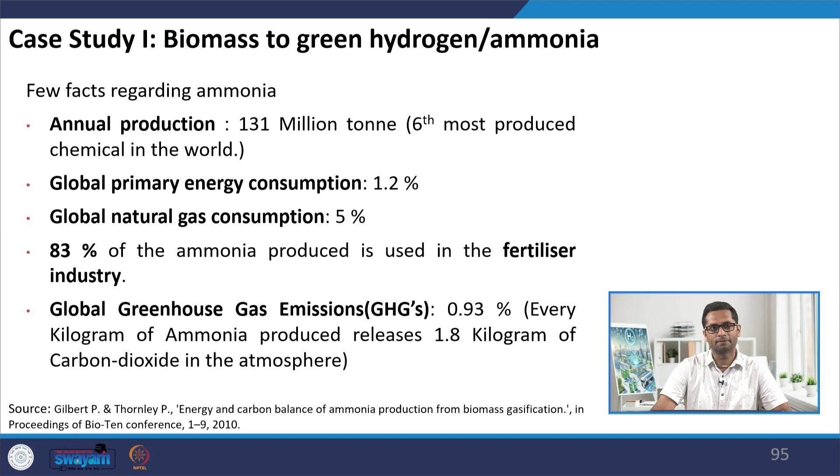Let's discuss a couple of case studies with respect to life cycle assessment. The first case study is with respect to production of hydrogen or ammonia from biomass. Why ammonia? Ammonia is one of the largest chemicals produced globally, and it's majorly produced from natural gas, consuming almost 5% of the natural gas available and leading to 0.93% of global GHG emissions. Also, 80% of the ammonia goes into the fertilizer industry, and as such it has a significant carbon dioxide footprint.

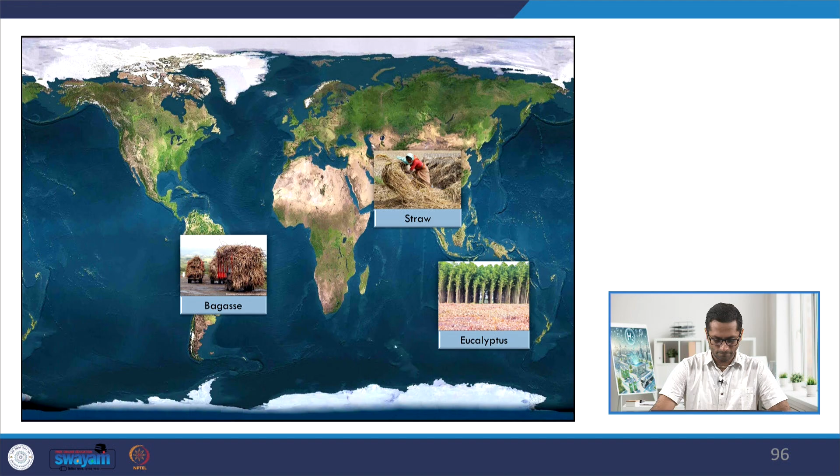So we wanted to see if we can have a supply chain from biomass to ammonia, as discussed in the previous classes, with a comparison of 3 different cases. We wanted to make a case for biomass to ammonia, where the biomass could be housed at 3 different places globally. We selected straw as biomass for India, eucalyptus as biomass for Australia, and bagasse as biomass for Brazil, to see how the same process of biomass to hydrogen leading to ammonia production would differ in techno-economics and life cycle emissions if set up in 3 different places.

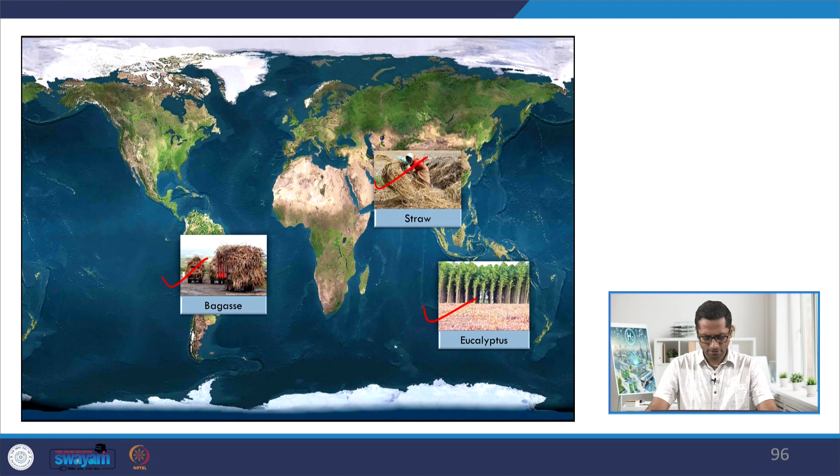You would also see that the different biomasses we selected have different supply chains. Rice straw is basically a farm waste, available in plenty but a scattered resource. Eucalyptus in Australia is an energy crop specifically grown on dedicated land, not a byproduct. Bagasse in Brazil is basically industry waste - they have huge refineries generating a lot of bagasse, currently used for cogeneration plants, but there could be other uses as well. So we wanted to see the effect of supply chain as far as this biomass is concerned.

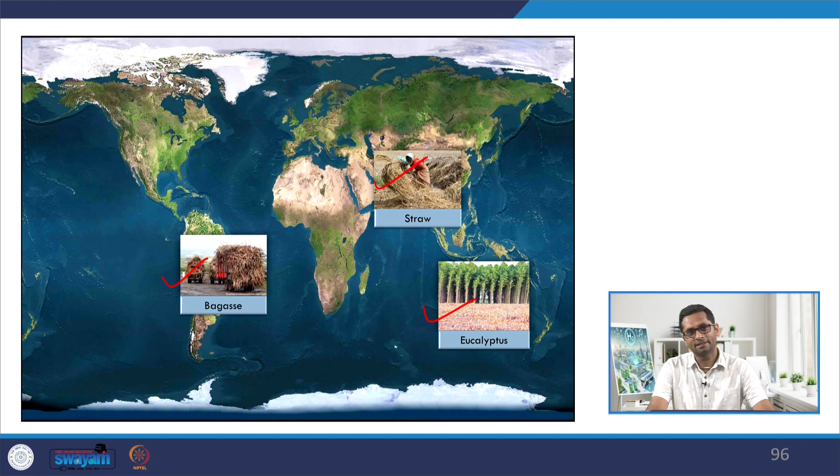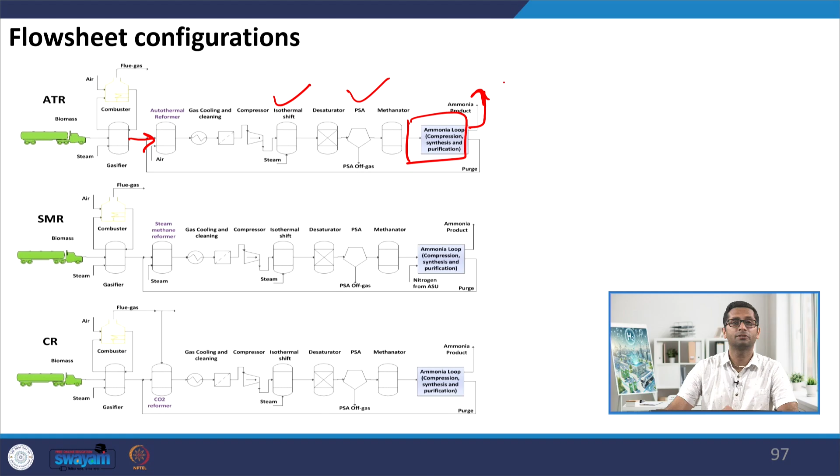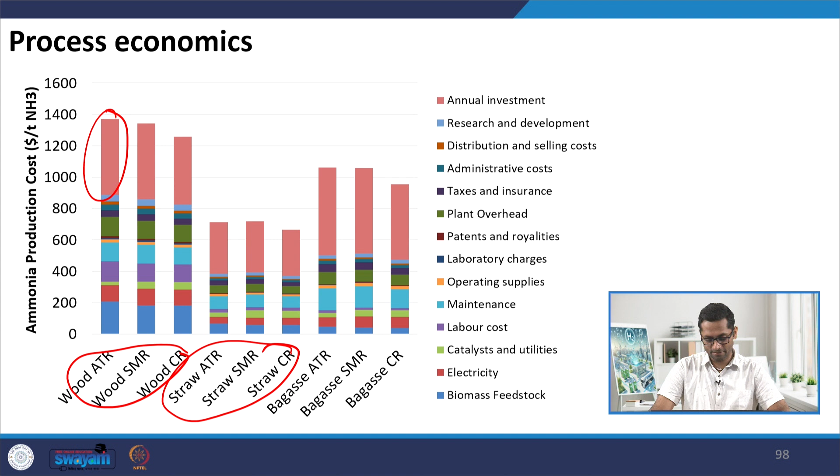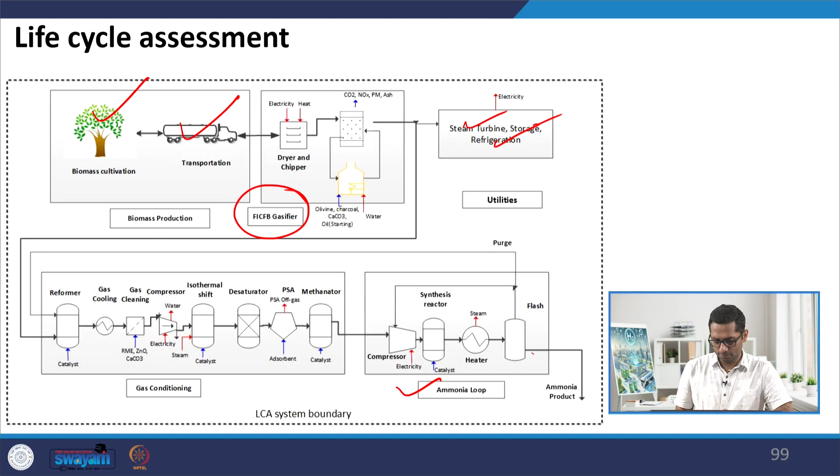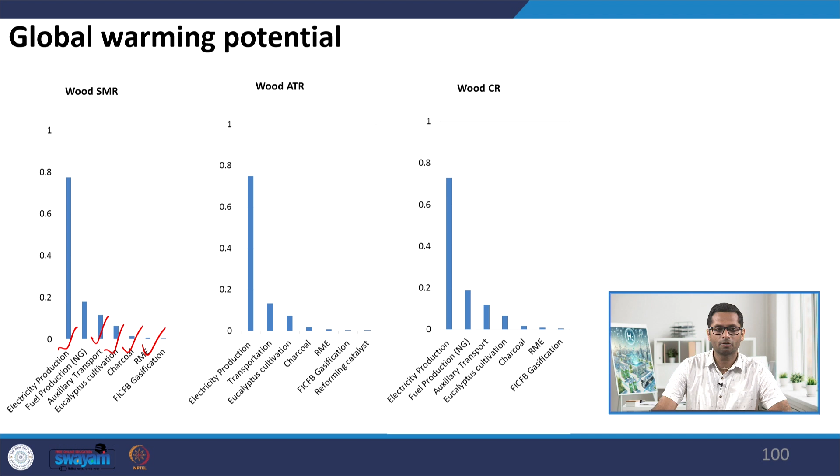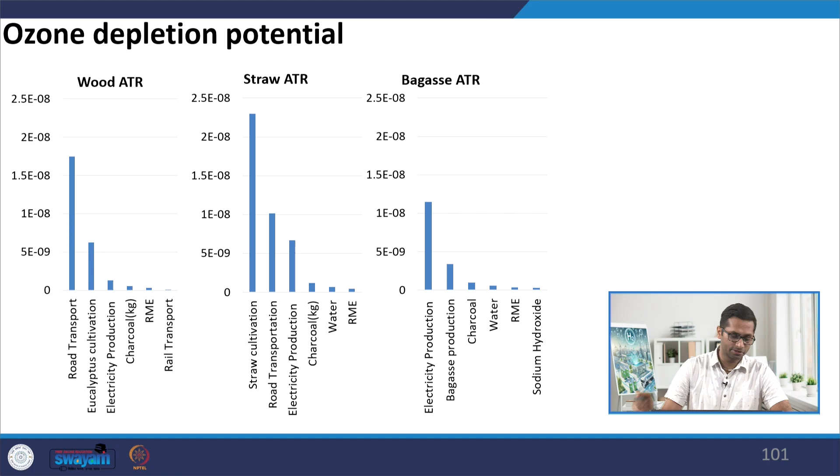Further, an interesting result comes with respect to the ozone depletion potential, which has been compared for 3 different biomasses: wood, straw and bagasse. If I consider Australia, the ozone depletion potential is mainly coming from road transportation. If I talk about India, it is mainly coming from straw cultivation. If I talk about Brazil, it is coming from electricity production. This is interesting because the majority of emissions for a particular impact category can come from 3 different processes in 3 different countries. That is why we cannot say that if a process is found sustainable in Australia, it will be equally sustainable in India, because the emissions could be very different.

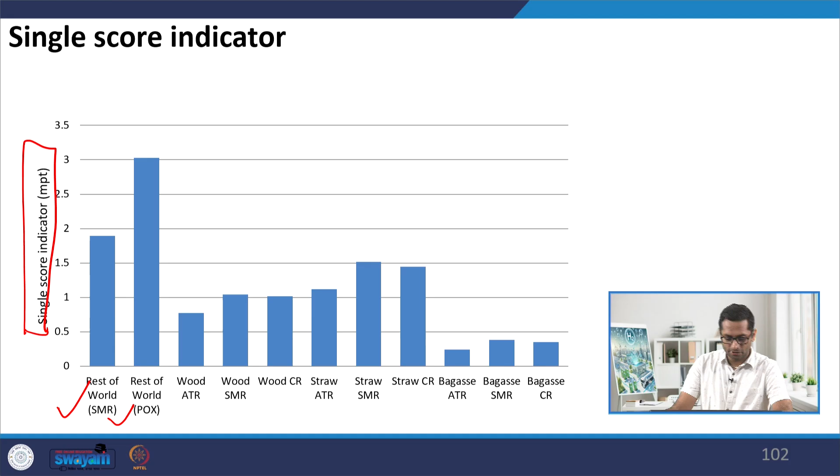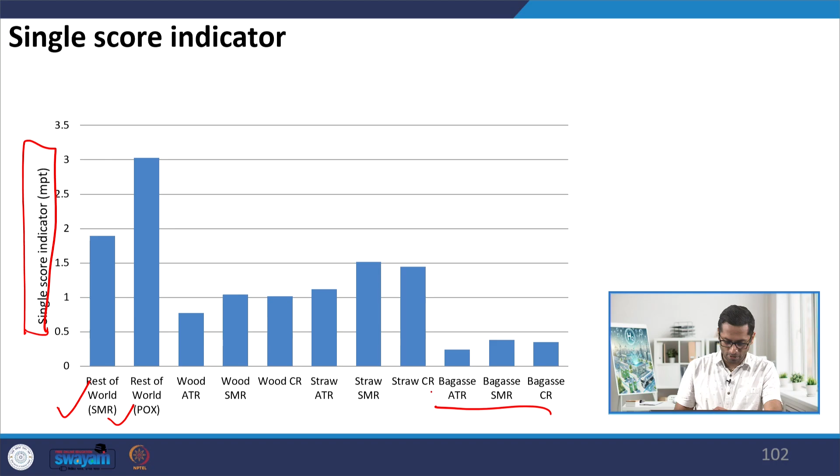Further, you can try to converge all the results into a single score category, where we take all the results as an endpoint into a single point. The results given here are for conventional steam methane reforming and partial oxidation based ammonia production, which vary from 1.8 to 3. No matter how we are producing it, we see significant emission reduction if all results are quantified into one indicator. But Brazil tends to have a major advantage, and India seems to have the least advantage as far as emissions are concerned.

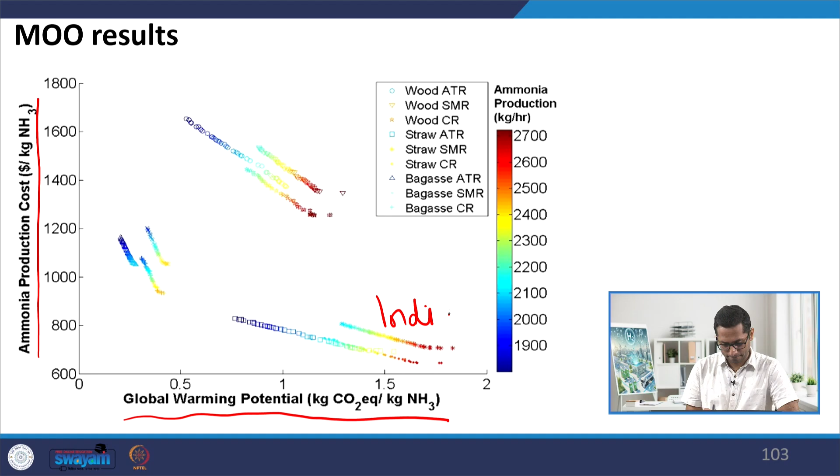Further, we can also see these results in terms of analyzing both economic and environmental parameters. What you see in this graph is global warming potential in kgs of CO2 equivalent per kg of ammonia on the x-axis, and ammonia production cost in dollars per kg of ammonia on the y-axis. Here are the results: this is for India, this is for Australia, and this is for Brazil.

What you see here is that in India you can produce biomass to hydrogen ammonia quite economically, but the emission reduction is not much because we are using a lot of grid based electricity coming from coal. Whereas in Brazil it is quite expensive, but the emissions are quite less, and one of the major factors is that electricity in Brazil is quite clean. If I talk about Australia, you get none of the advantages - it's expensive as well as the emissions are quite substantial.

So this is how you learn that there are substantial changes in terms of both emissions and economics as you move from one country to another, because different processes could have different supply chains and different factors that play a role. That is why in-depth techno-economic and LCA analysis should be carried out with respect to country specific conditions, and this is what we have tried to equip you with in this course.

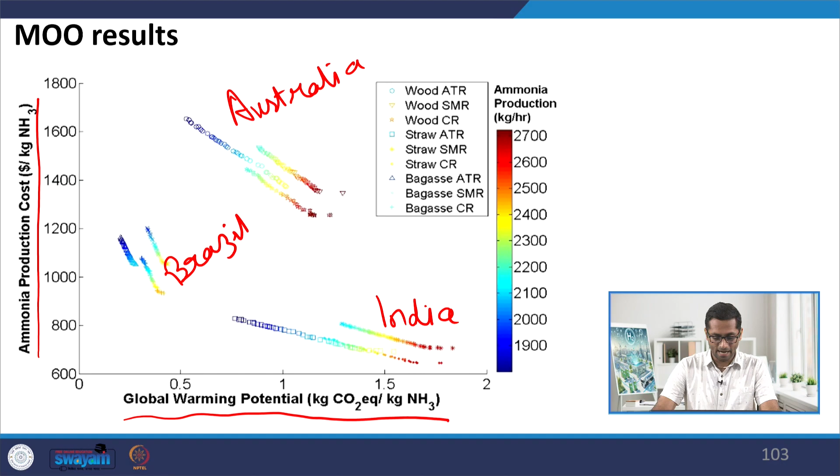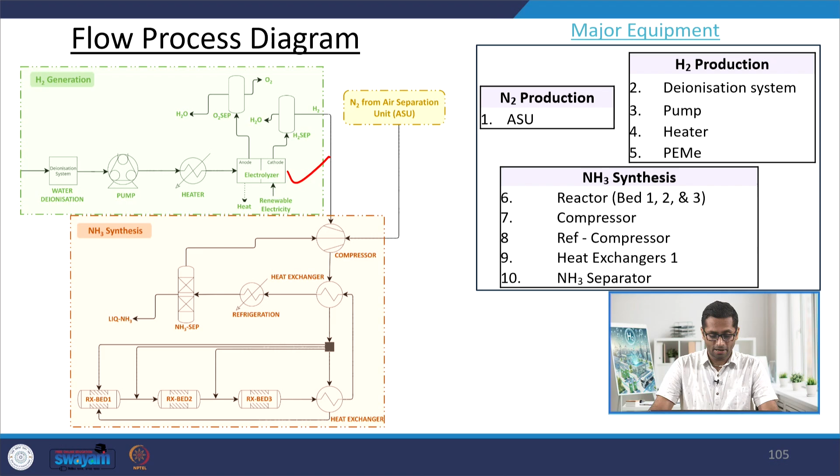Now let us take another example where we are doing an economic and emission analysis of green ammonia production through the electrolysis route. The process again involves an electrolyzer, a PEM based electrolyzer, which takes in deionized water and electricity and produces hydrogen. Here you can also see the BOP, and then you would have the ammonia production loop in terms of the Haber-Bosch process. This process was again modeled in Aspen Plus, which you learned a couple of classes back, to make up the mass and energy balance.

Once you have the process ready, the electricity for running the electrolyzers can come from different sources. It can come from the grid, where it is available 24 hours a day. It can also come from a dedicated solar plant, where we are assuming it will be operating on average for 7 hours a day in India.

It could be a mixed grid which has 24 hours of operation, running 7 hours on solar and 17 hours on grid. It could also be an off-grid plant where 7 hours come directly from solar and the rest 17 hours from a dedicated battery system trying to make up the energy requirement during night time as well. So in 3 of the 4 cases you are running the plant for 24 hours; in one case you are running it for just 7 hours.

We wanted to see how the economics as well as the emissions change for these kind of pathways.

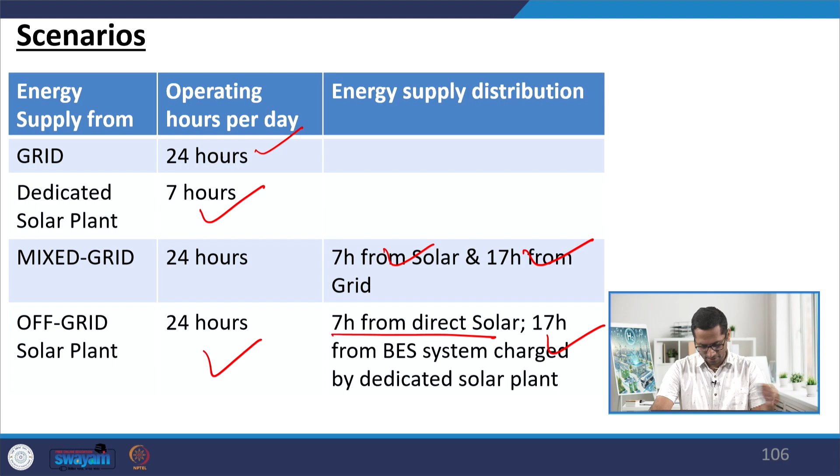Coming to the economics first, for the grid-based system running 24 hours, the operating expenditure is basically dominating the yearly cost. Majority of it goes to operating cost because we are buying electricity from the grid, and that is a major expense.

Roughly for 1 kg of hydrogen I am using 55 to 59 units of electricity, so that's a major expense, and of course there's capital expenditure too. If I go towards 7 hours of operation from solar, my capex increases vastly because I'd have to set up a big solar plant to meet demand, and the OPEX reduces drastically since I'm not importing any electricity. The only thing I'd need is water and some other chemicals which are quite cheap, so my operating expenditure has gone down vastly.

Then there's a third pathway where I go 7 hours with solar and 17 hours from grid. Here the capex remains the same as the earlier case because I still have the solar plant providing electricity for 7 hours. For the remaining 17 hours I'm buying electricity from the grid, and this is why you see an increase in OPEX here.

The fourth pathway is operating the plant on so-called green energy, where the solar plant is much bigger in size and so is the battery backup. I've assumed a much bigger plant with solar backing up the remaining 17 hours as well, with a huge battery capacity, and my OPEX has gone down significantly as well.

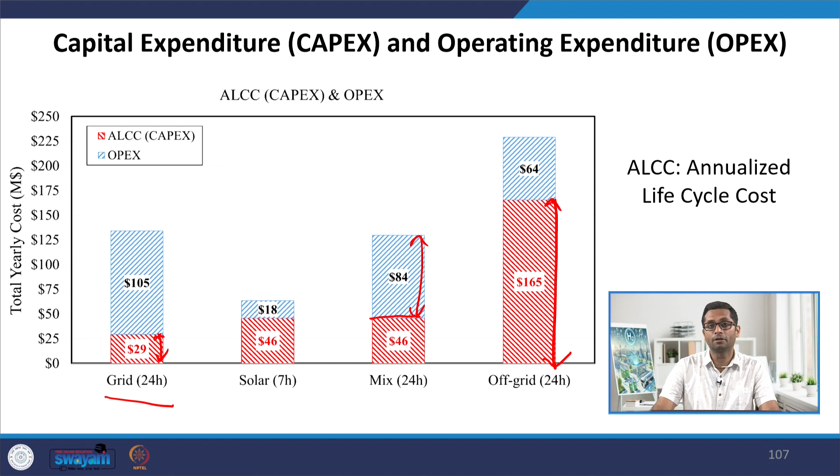So this is with respect to the yearly cost. If I talk about the levelized cost of ammonia, which is the yearly cost divided by the ammonia produced each year, this is how the cost would vary. On the last I have also given the cost for conventional ammonia, taken to be $500 a ton or $0.5 per kg.

For grid-based ammonia, it's roughly of the order of $1.1 per kg, almost double that of conventional ammonia, but it increases to almost $1.9 if going with only solar operating for 7 hours. If I go with solar plus grid, meaning 7 hours of solar and 17 hours of grid, the cost comes back to almost $1.1. And if I go completely off-grid, the cost is roughly $2 per kg of ammonia.

So what insights can I get from this analysis? One is the comparison between the scenario running 7 hours of solar and the 24-hour solar plus batteries scenario. Given that I'm getting almost similar results with levelized cost of ammonia, I would always choose to run a plant on solar only, because even with battery backup I'm investing so much money and still the levelized cost of ammonia isn't reducing. So it's always better to only operate the plant for 7 hours in a day, letting it stay idle for the remaining 17 hours, because it's not giving any cost advantage. A bigger investment in a big solar plant and battery backup doesn't hold much value because battery storage is quite expensive.

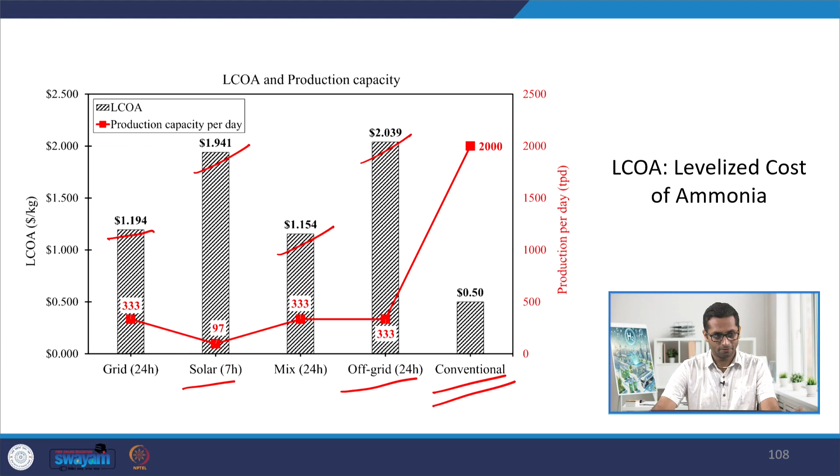Further, some of you might think there could be significant revenue from oxygen sales as well, since electrolyzers produce both hydrogen and oxygen. Even if these oxygen sales are considered, the costs are going to come down, but there's not going to be much drastic reduction that occurs.

So even if I take a very inflated price of oxygen like $100 per ton, the price is not going to come down very heavily. The interesting result would be to see these results overlapped with the CO2 emissions.

On the y-axis on the left is the levelized cost of ammonia in dollars per kg, and on the right is the CO2 emissions in kgs of CO2 per kg of ammonia, with different cases shown. On the right hand side are the conventional cases producing hydrogen or ammonia through natural gas, coal or fuel oil. The price is assumed to be $500 per ton and the emissions vary from 1.6 to 3.8.

Now comparing that with the 4 cases I've devised, using electricity for PEM electrolyzers leading to hydrogen and then ammonia production. For the grid based cases, the cost, shown in the blue bar, increases, but the emissions are significantly higher, almost 4x compared to the conventional case. Why is that? Because I now have a lot of uncertainties in the system. I presently have a coal based grid where the power plants producing electricity are not very efficient either.

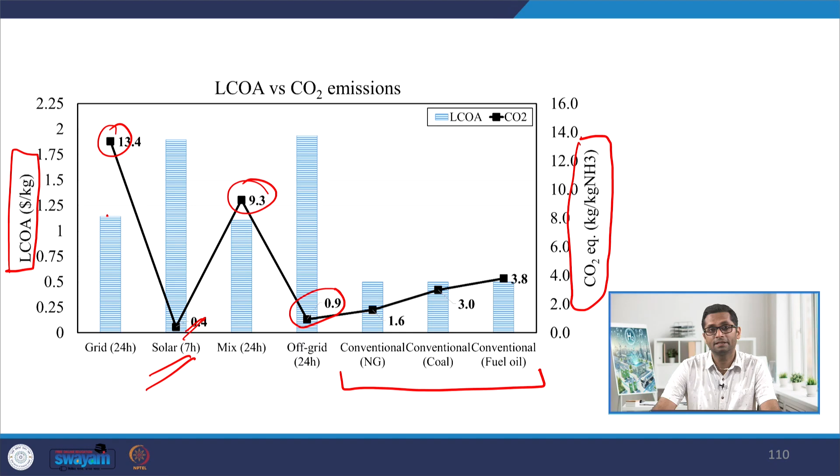We can look at another case study where I am cracking ammonia for producing hydrogen for refueling vehicles. This phenomena is gaining traction in European countries because they do not have a very good hydrogen supply chain, but they do have a very good ammonia supply chain. So what they want is, until the hydrogen storage transportation network is set up, to transport the ammonia to the refueling facility, crack the ammonia there itself, and refuel the vehicles.

So this is the analysis we did, where we are more concerned about ammonia cracking at the refueling station, so that I do not need to store or transport the hydrogen, just crack the ammonia at the filling station and fill the vehicles. We also wanted to see how that compares with the traditional approach where hydrogen is produced through PEM electrolyzer, hydrogen storage, and hydrogen dispensing. This analysis was done with respect to India, so let's see what the results are.

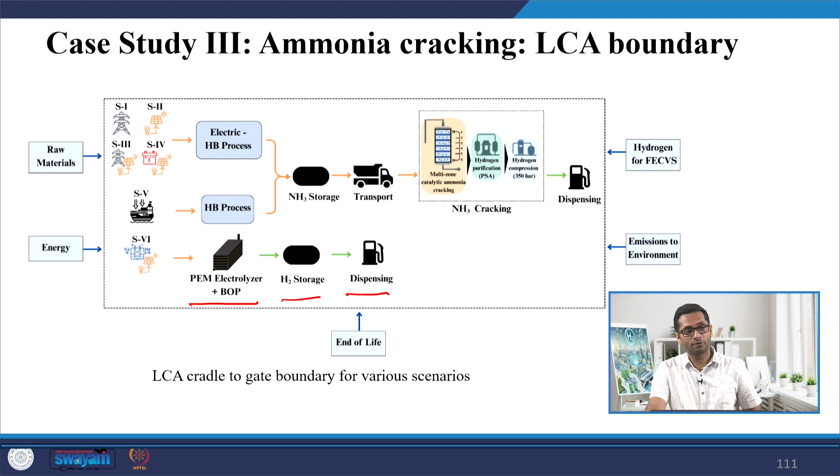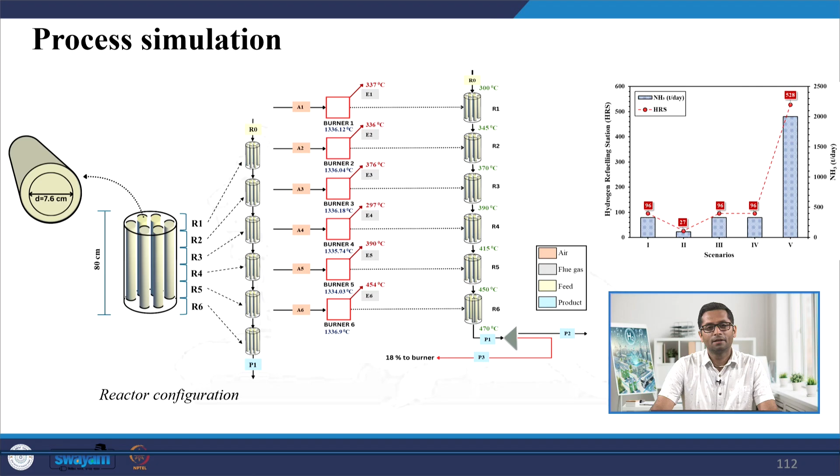Again, the simulations were done in Aspen Plus, where you can see this is the reactor modeling for the ammonia cracker reactor, because ammonia crackers are not readily available in the market today and the data is quite scarce. This is where process modeling can help ascertain the heating profile and the different losses expected to occur in the process. If I look at the results on the right hand side, they are with respect to the direct hydrogen system.

Now compare that with ammonia based systems. Again, the ammonia can come from either grid, solar, grid plus solar, solar plus batteries, or conventional ammonia. You can see that almost all of these cases happen to be much more expensive compared to the SMR based system, and the emission reduction is also not very substantial.

There are only two cases where you can have emission reduction: solar, and solar plus batteries. In the case of solar, the emission goes as low as 3.2, whereas it goes only till 10 kgs of CO2 equivalent per kg of hydrogen. So this might not be a very good option for India, and these are the results you get from an in-depth techno-economic and life cycle assessment, where you can see whether a particular pathway you are envisioning might make economic or emission sense for the Indian case or not.

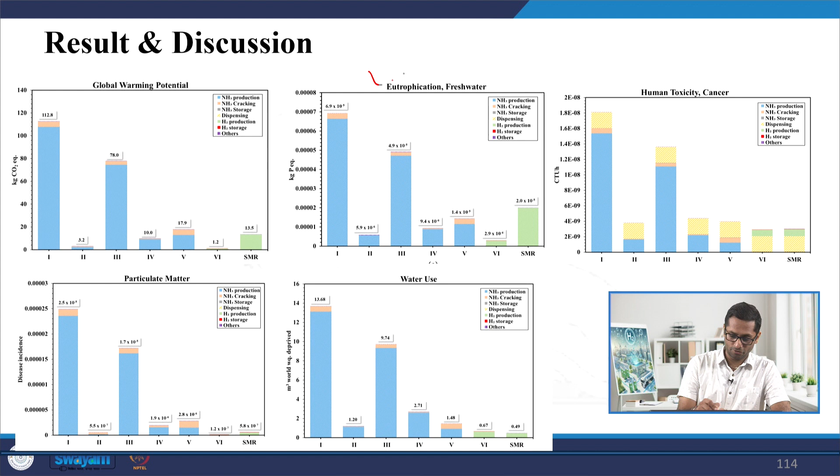You can also try to understand the emissions occurring on other fronts, like eutrophication, human toxicity, water use, and particulate emission. Just to give an example, if I compare electrolytic hydrogen versus SMR, the electrolytic hydrogen tends to have much greater water use compared to the SMR based one. Further, ammonia based systems could have much greater emissions in terms of eutrophication as well as human toxicity. So these are some things we need to be careful of, and a life cycle assessment basically helps highlight some of these factors.

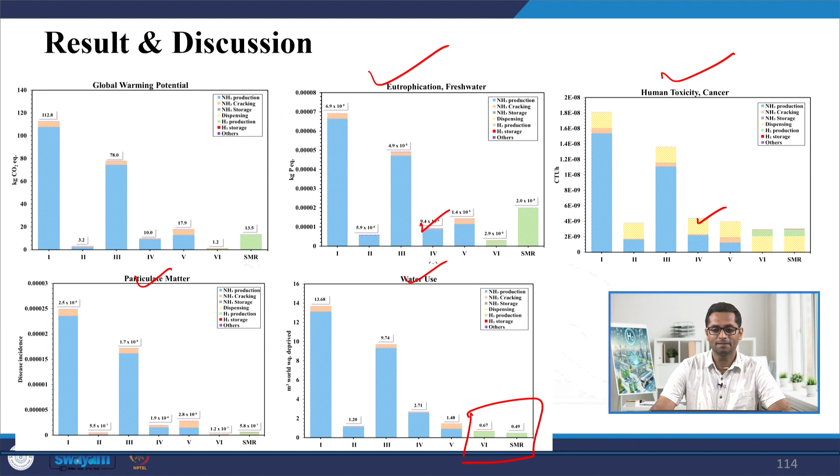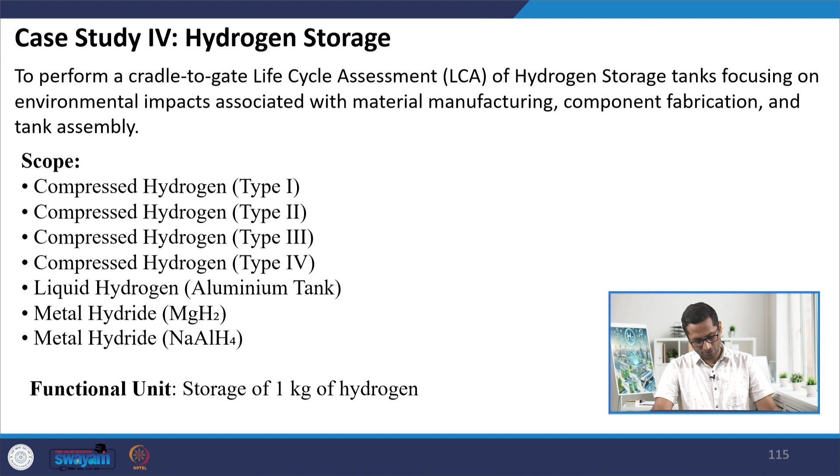So then we can also do a life cycle assessment with respect to hydrogen storage. This is the preliminary results of a study we carried out at IIT Roorkee, where we wanted to see the life cycle emissions from construction and disposal of different storage methods: type 1, type 2, type 3, type 4 cylinders, liquid hydrogen cylinders in aluminum tanks, and metal hydrides, two types being magnesium hydride and sodium aluminum hydride. The functional unit for this case was storage of 1 kg of hydrogen.

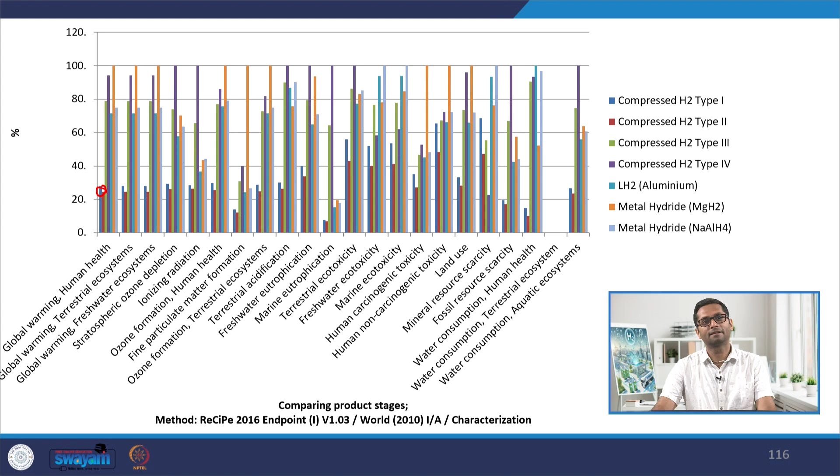So we can see that the different kinds of storage could have very different emissions coming from different aspects. If I talk about global warming, the least one was coming for the type 2 cylinders, and there could be other emissions that come as well. I'm not going to detail all of it, but this helps us choose the sustainability of hydrogen storage, considering the construction of the cylinders, the use of the cylinders or other storage mediums, and the disposal of the cylinders.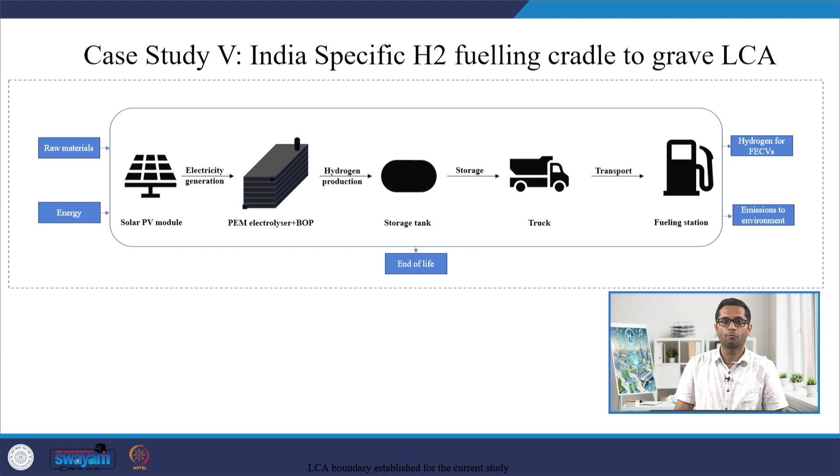Then we can have another case study where we want to see the complete life cycle of a hydrogen refilling station, where you have solar PV modules producing electricity, going to a PEM electrolyzer, storage, trucking, and going to the fuel station and filling into a fuel cell electric vehicle. So if this was the case, the inventories would be extensive, because the dispensing station could have different materials going into it.

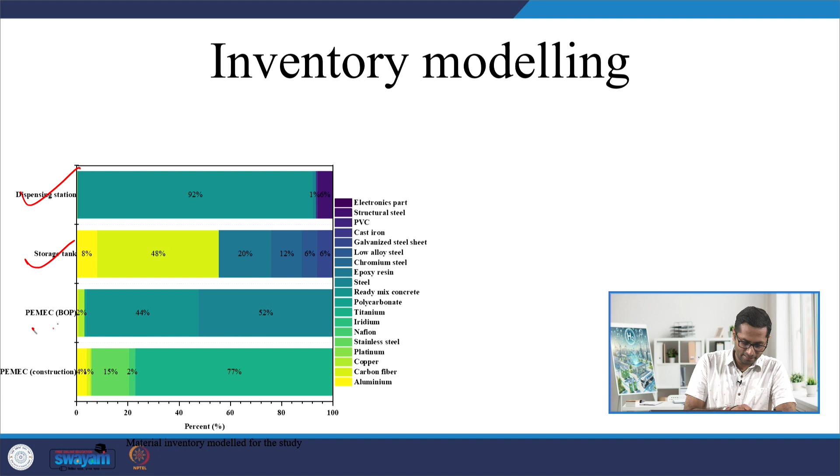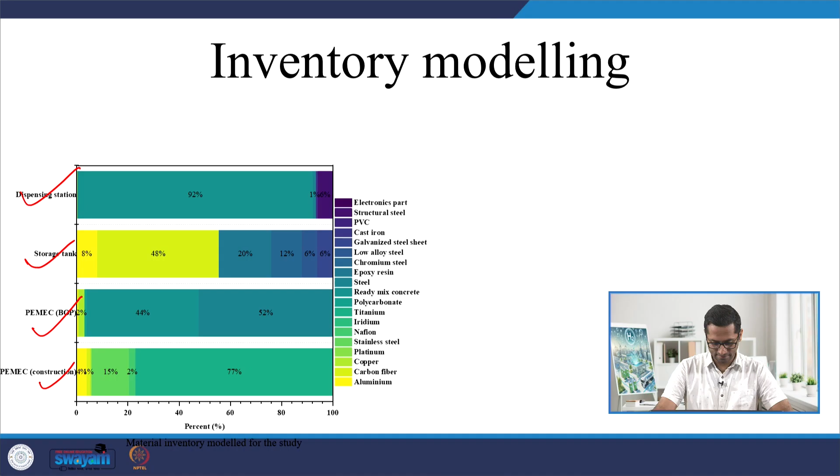In the storage there would be entirely different materials, entirely different from the PEM EC balance of plant, and somewhat different for the construction of the PEM electrolyzers. So these are the type of inventories that you would have to build up for doing this analysis. We did this analysis in Gabi software, and the results could be somewhere given here.

If I talk about climate change, we would have different impacts coming from different phases, but we can see the majority of the impact comes from the PV electricity in the case of climate change. Whereas if I talk about water use, it's basically the PEM electrolyzer that is getting used. If I'm talking about human toxicity, it's mainly coming from the dispensing stations. So the different aspects of a life cycle of this process could have very different kinds of emissions coming in.

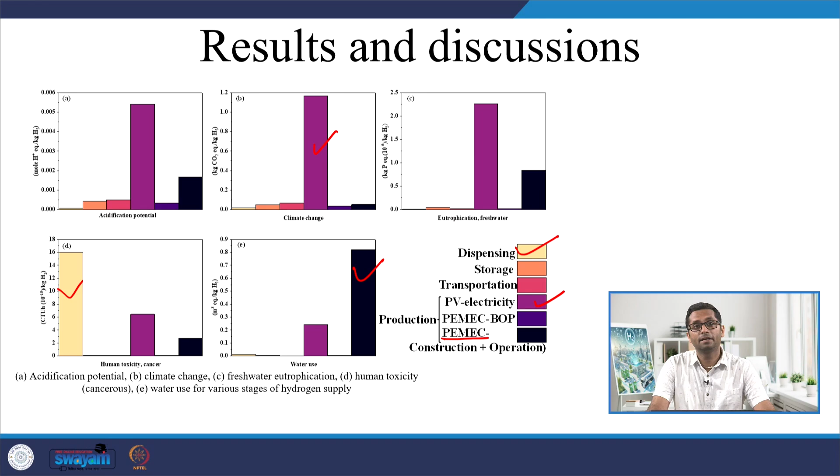We can also compare these impacts with the traditional SMR based system, given in dark blue color here. If I consider the case of global warming potential, category I2, you would see that I am bringing down the emissions significantly in terms of CO2 emissions.

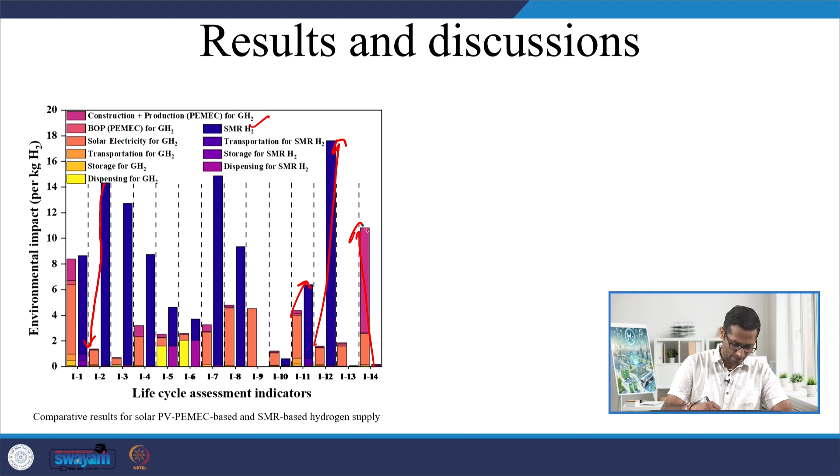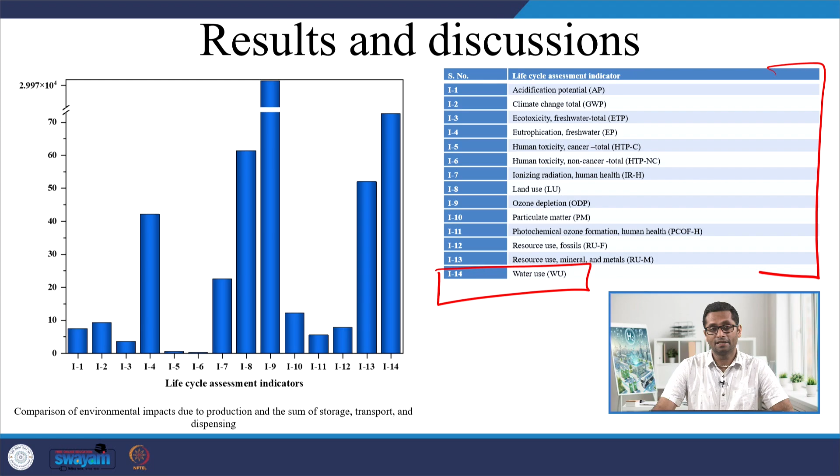But we also need to be careful that there are certain emission categories where emissions are going up, specifically for I11 and I12, and this is specifically true for I14, which is basically water use. So water use is way larger as compared to the conventional SMR process.

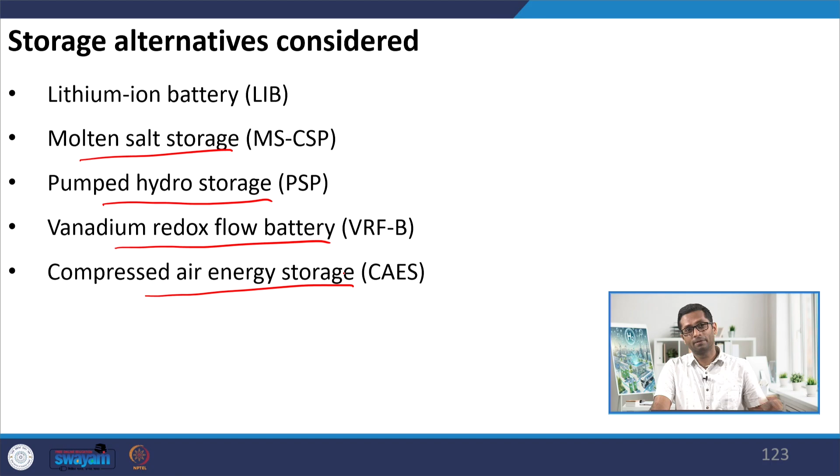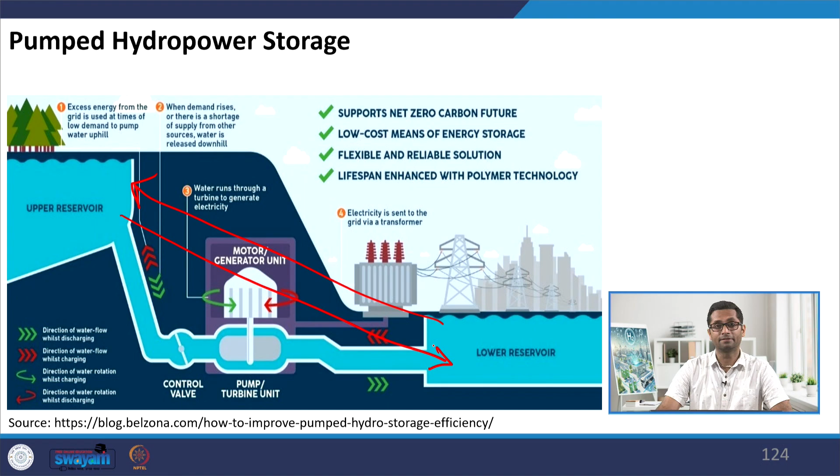To give you an idea of these storage options: pumped hydro is basically akin to a normal hydro plant, but whenever you have excess electricity available through solar or wind, a pump will pump water from a lower reservoir to an upper reservoir, and whenever you need electricity, you just let the water flow through the turbine and generate electricity.

When I say battery energy system, you are aware of it - all of you would have seen inverter batteries in your homes. So what we tried to analyze were two kinds of batteries: one was lithium ion batteries and the other was vanadium redox flow batteries.

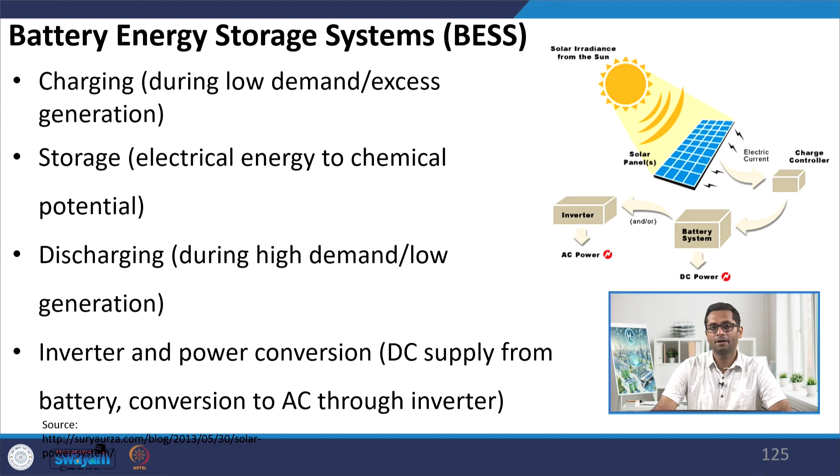Then the third option was molten salt energy storage, wherein sunlight or direct solar radiation is used for increasing temperature using a solar concentrator, then using some kind of phase change material to raise the temperature to 500 degrees Celsius or so. This material stays at elevated temperature for quite some time, and during night time you can use this high temperature material for raising steam and generating electricity, then heat it up again during daytime.

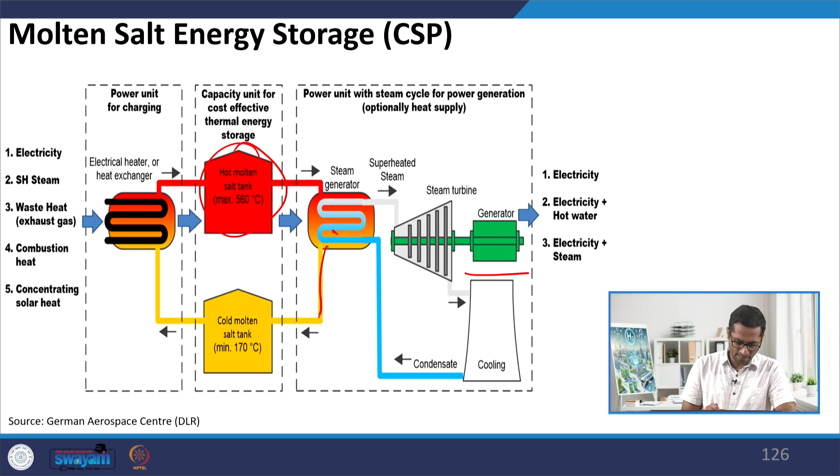The fifth option we compared was compressed air. Akin to pumped hydro, whenever you have excess electricity available in the grid, just compress air in some kind of underground reservoir, and whenever you need electricity just expand this air, run a turbine and generate electricity. The efficiency of this plant is roughly of the order of 60%, so not very great.

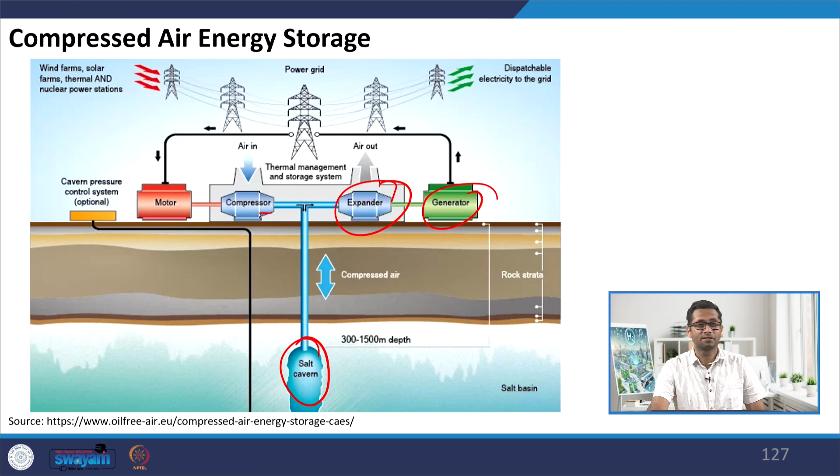So you can do this analysis with respect to life cycle assessment, where you would want to consider the construction phase, the use phase, and the disposal phase of the different options. Let me directly jump to the results here.

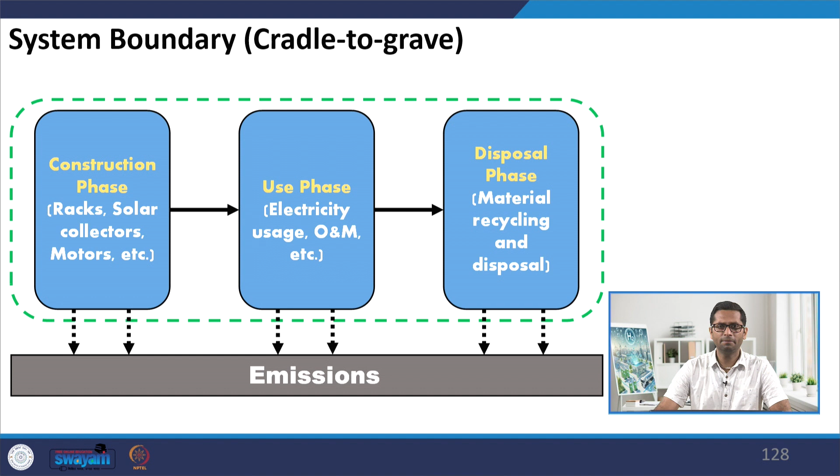If you would want to compare the different options with respect to levelized cost of storage and global warming potential - with global warming potential on the x-axis and levelized cost of storage on the y-axis - you will see that pumped hydro storage seems to be the best option, as far as both global warming potential and levelized cost of storage are concerned.

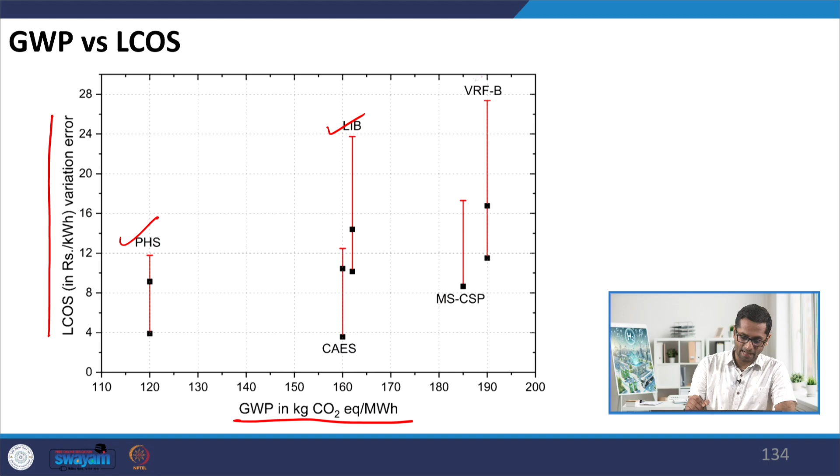Batteries, both lithium ion and vanadium redox flow, tend to have greater emissions, and the economics is not very favorable either. From the economics point of view, compressed air and molten salt storage happen to be almost comparable to pumped hydro. So these are the kinds of analysis that can help you with in-depth techno-economic analysis and life cycle assessment of different systems.

So in this class we have tried to understand the different trade-offs with the help of results of life cycle assessment and techno-economic analysis with respect to hydrogen energy based systems.